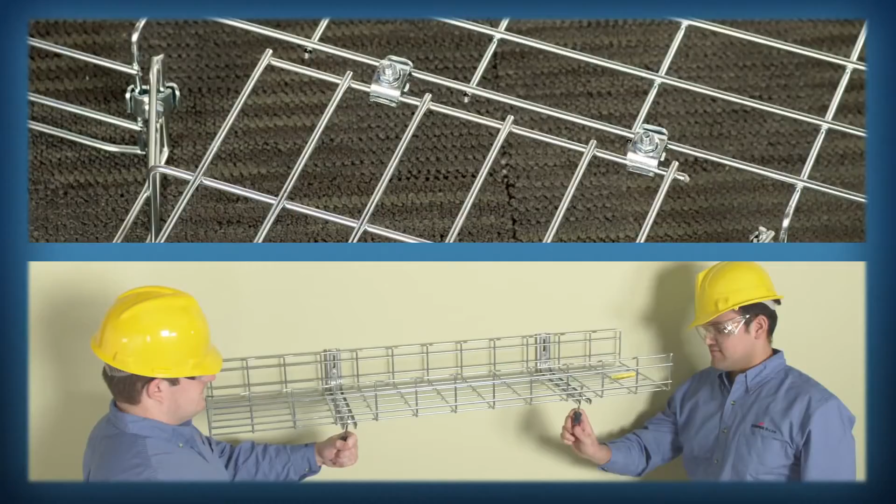Cooper B-Line's FLEXTRAY cable management system adds value on the job site by delivering flexibility and labor savings. Our systems combine strength, lightweight construction, depth, and unmatched adaptability to support cables, tubes, and flexible gas tubes in a fast and economical way. Let's take a brief look at the key features and benefits of Cooper B-Line's FLEXTRAY, then get into demonstrating how FLEXTRAY can be cut, spliced, and bent on the job site.

FLEXTRAY offers the T-Weld safety edge, protecting both the cable and the installer while installing cables. FLEXTRAY utilizes the largest gauge steel in the industry to give you stronger trays. FLEXTRAY offers one of the largest range of sizes available, and FLEXTRAY is also UL classified as an equipment grounding conductor, saving you time and money during the installation process.

Materials for installation. Having the correct tools and safety equipment is the first step in FLEXTRAY cutting, bending, and installation. Before you get started, be sure you have the FLEXTRAY catalog for installation instruction reference, safety hard hat, glasses, and gloves, clean shear or bolt cutters, markers to pre-mark your wire cuts, and all the FLEXTRAY and splice hardware.

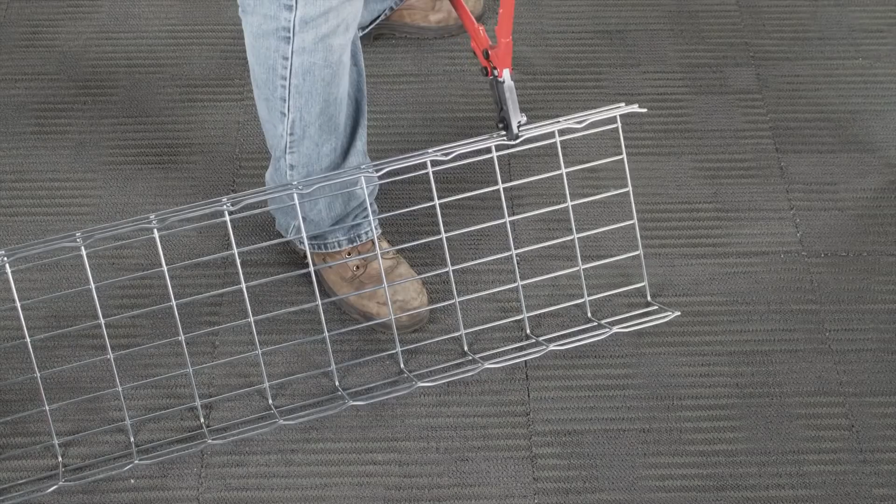Cutting techniques. Utilizing the proper cutting technique is crucial to FLEXTRAY installation. While standard bolt cutters are sufficient for FLEXTRAY wire cutting, Cooper B-Line recommends the use of the patented clean shear cutters, designed specifically to safely cut and bend FLEXTRAY into any configuration. The first step is to get familiar with your cutting tool by practicing cuts on a scrap piece of tray.

It's a good idea to mark the wire and sections you're going to cut before you get started. Once you've marked the tray, position the bolt cutter blades near the cross wire and perpendicular to the wire to be cut. Ensuring a proper cut will make the assembly faster, easier, and safer, and minimize the amount of end cut grinding required.

After you've finished cutting all side wires, turn the tray open side down and cut the wires from the bottom of the tray. Finish cutting by moving to the other side of the tray and cut the remaining wires. Before starting FLEXTRAY assembly procedures, please review the materials segment of this program for safety equipment details.

Tray splicing. End-to-end splicing of tray is quick and simple with the traditional splice hardware of Cooper B-Line's washer splice kits, where the washer is pre-staked to the bolt to hold it stationary during installation. To begin splicing, place the washer over the end wires of each section of tray with the bolt going between. Repeat until all splices are in position. Fasten the washer and bolt with the nut and finger tighten.

Then tighten with a wrench. Remember to always place the nuts on the outside of the tray to protect cable while pulling. For permanent tray splicing, use Cooper B-Line's Flexmate splice system and specially designed Flexmate crimping tool. To splice, place the Flexmate splice clip over the two tray sections' end wires and crimp the splice clip permanently into position.

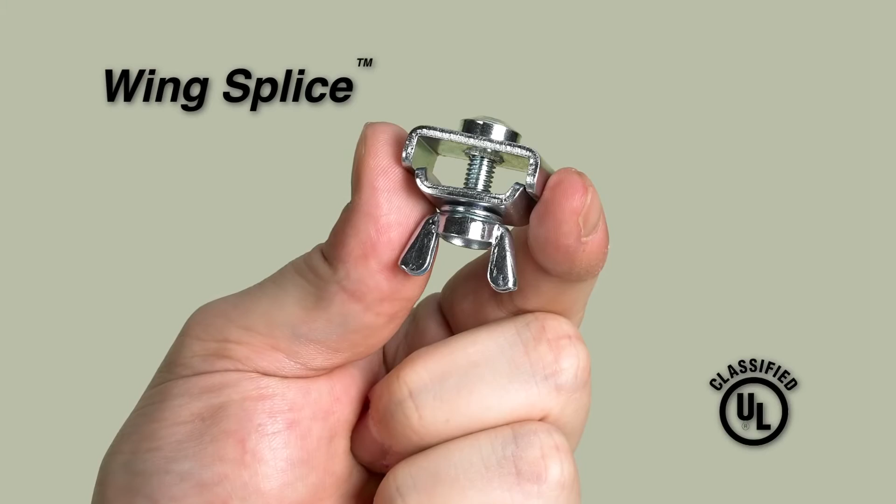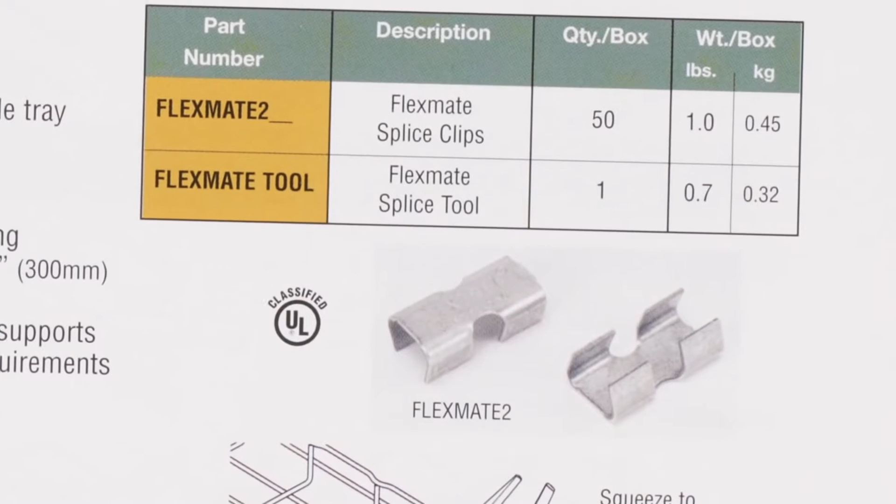Flexmate is one of the fastest and most aesthetically pleasing tray splicing methods available in the industry for sturdy, light-duty tray splicing. To further reduce tray section splicing, bending, and installation time, use Cooper B-Line's wing splice kits, designed for toolless installation. Simply install the two-piece wing splice washer and bolt assembly, and hand tighten the wing nut. If you want your ground path to flow through your splices, choose UL classified splices and use the quantity of splices specified in the product catalog.

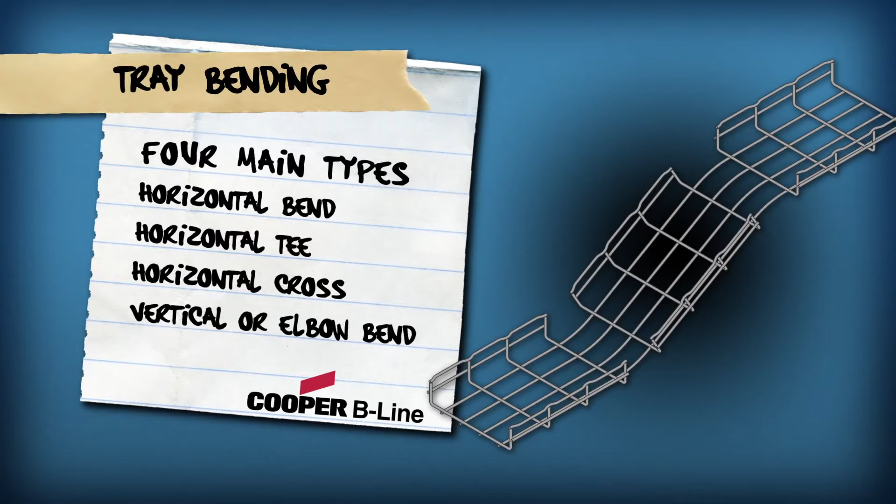Before starting FLEXTRAY assembly procedures, please review the materials segment of this program for safety equipment details. Tray bending. The ability to customize and bend Cooper B-Line FLEXTRAY on-site gives the installer unsurpassed job site flexibility and labor savings. While there are many ways to bend and splice FLEXTRAY configurations, there are 4 main types: the horizontal bend, the horizontal T, the horizontal cross, and the vertical or elbow bend. Let's take a quick look at how to quickly cut, bend, and splice each configuration.

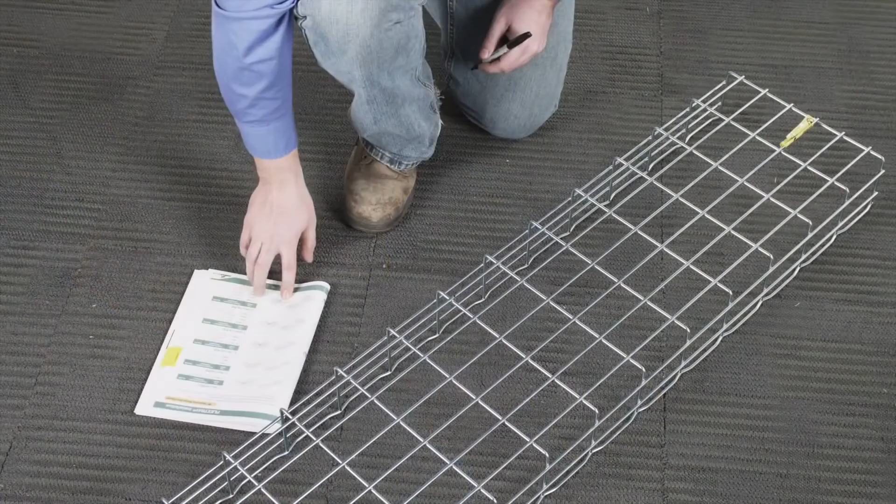The first step to create any horizontal or vertical bend is to refer to your Cooper B-Line FLEXTRAY catalog to see what wire segments need to be cut and removed from each tray in order to bend the tray to the desired configuration. The next step is to mark where the cuts will be made. Then, make the cuts. For the horizontal bend, you need to remove 2 sections of the tray's bottom wire, leaving the tray's side wire in place. Once the tray's bottom wire has been removed, bend the tray into the 90-degree position.

For assistance in making an exact 90-degree bend, the clean shear bend tool may be used. Place the tray on top of the tool so that the side of the tray is in between the rods and the center of the cutout portion lines up with the center of the tool. Hold the tool in place as you bend the tray. The clean shear bend allows one installer to make the bend easily and to an exact 90 degrees.

Then secure the bend and horizontal configuration using Cooper B-Line's washer splice kit, Flexmate permanent splice clip, or wing splice kit hardware. As you can see, the process is simple and easy to accomplish.

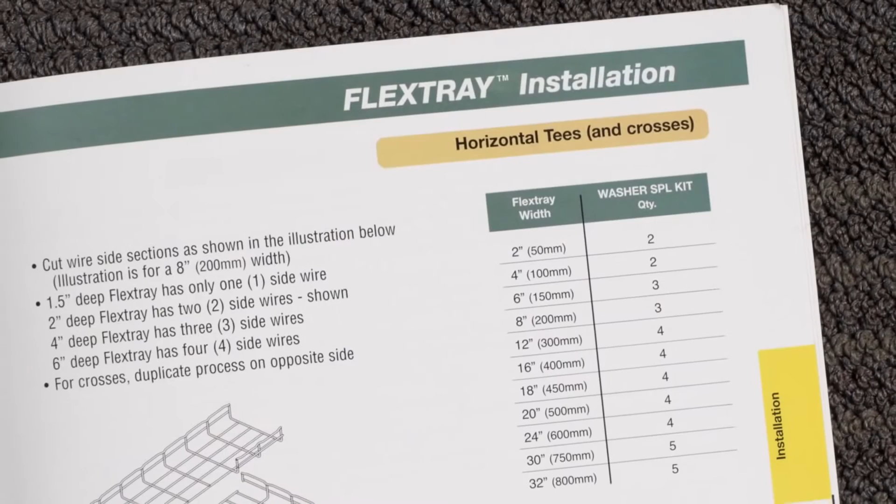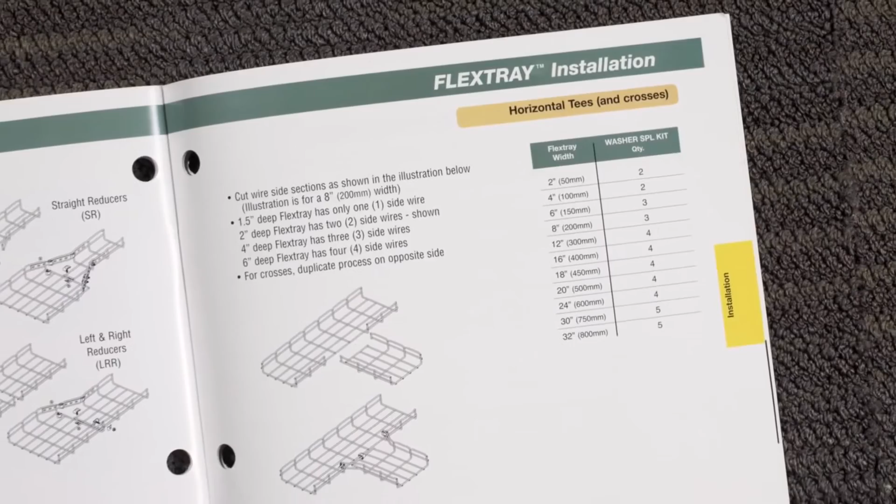Making a horizontal T from 2 sections of FLEXTRAY is just as simple. Again, check the FLEXTRAY catalog to see and properly mark the necessary wire cuts to the sides and end of the tray sections. Make the cuts to each section. Then, using a long screwdriver or other pry bar type tool, bend the sides of the intersecting tray outward to approximately a 30-degree angle.

Correctly position the 2 sections of tray together on the floor. And first, splice and tighten the adjacent bottom sections of the adjoining trays with the appropriate splice kit hardware. Then splice and tighten the horizontal T-side sections together.

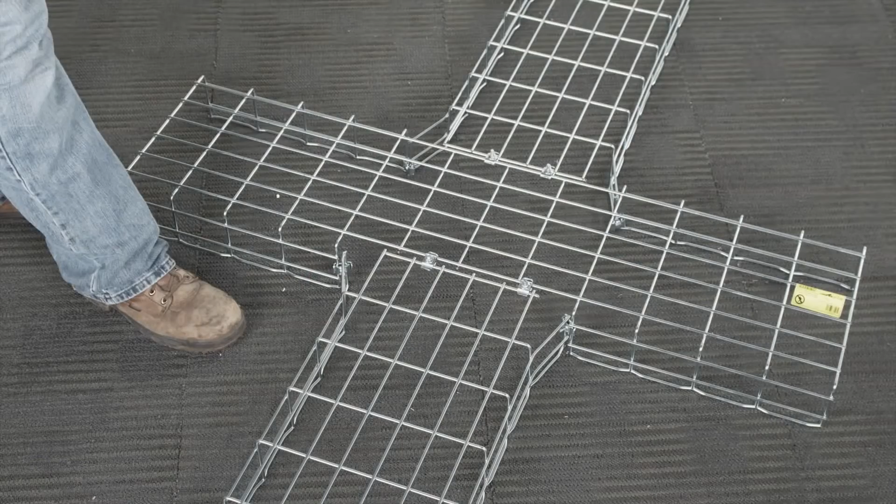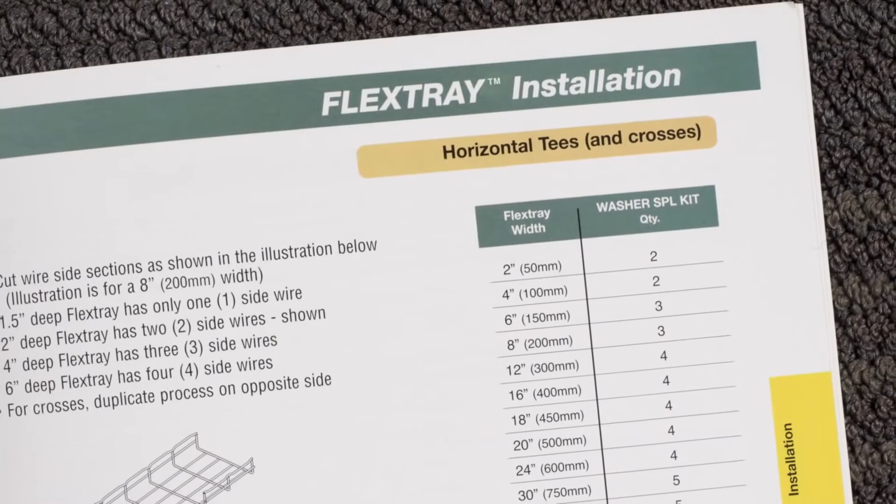Fabricating a horizontal cross FLEXTRAY configuration is very similar to the horizontal T. The only difference is removing wire sections from both sides of the designated center section of the horizontal cross. Start by referring to the FLEXTRAY catalog to mark and make the necessary wire cuts to each side of the center FLEXTRAY section. Then, remove the wire sections from the ends of the 2 intersecting trays.

Again, using a long screwdriver or other prying tool, bend the end of the tray side sections out to a 30-degree angle. Then, install and tighten the splice kit hardware to secure the tray bottom. Then secure the sides of each tray to create the horizontal cross.

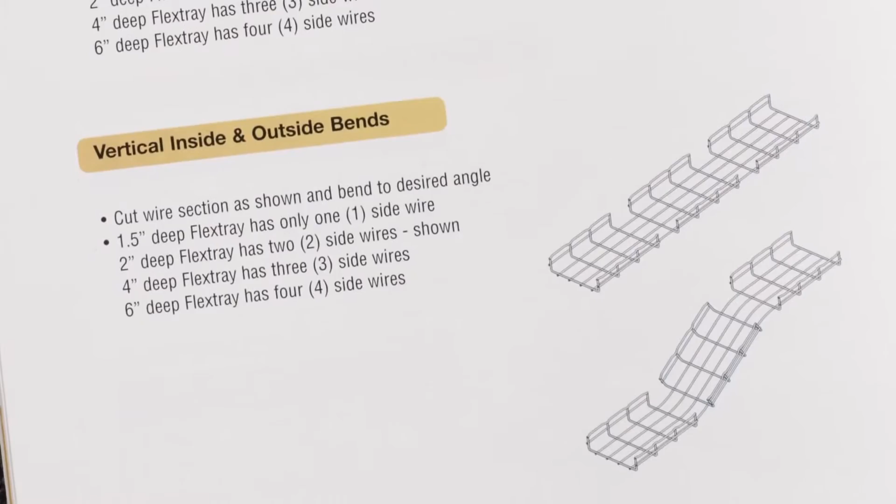Creating a vertical bend out of a section of FLEXTRAY is quite simple. Again, refer to the FLEXTRAY catalog to identify, mark, and cut away the correct tray side wire sections. Place the tray on the floor and secure one end of the tray with your hand or foot. Then, bend up on one end section to create the first appropriately angled leg of the vertical drop. Turn the tray over and bend the other end section to create the second leg of the vertical drop.

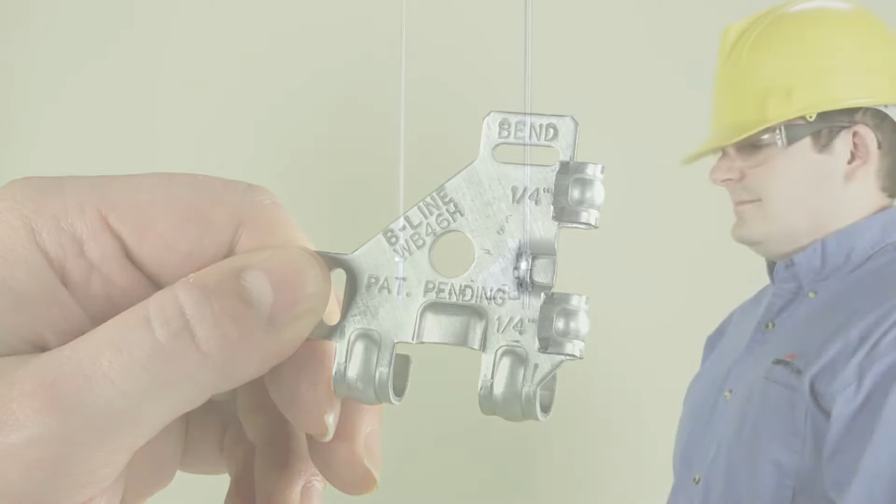Before starting FLEXTRAY assembly procedures, please review the materials segment of this program for safety equipment details. Ceiling support methods. Cooper B-Line's FLEXTRAY can be installed and supported from the ceiling with threaded rod in several convenient and labor-saving ways. The patent-pending flip clip requires no tools and can be locked in for permanent installations onto both 1/4 and 3/8 inch rod sizes. With the flip clip, you only need one hex nut to hang and level FLEXTRAY, no washers needed. This means less material and time needed to hang and secure your tray.

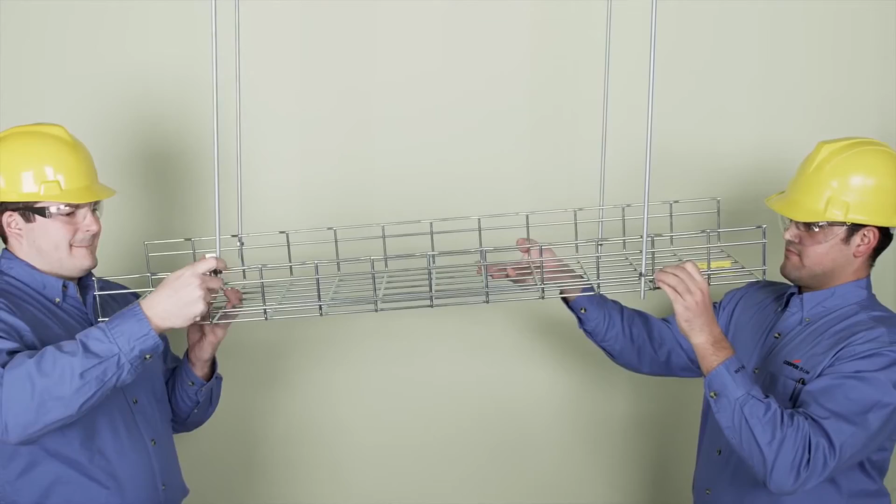First, position a nut on each threaded rod at the desired height. Lift the FLEXTRAY section into position, then attach the flip clip on the threaded rod and pre-positioned nut. Next, snap and hold one side of the FLEXTRAY onto the flip clip, then the other side. Bend the flip clip tabs to lock the flip clip onto the rod and then lock the tray section into position.

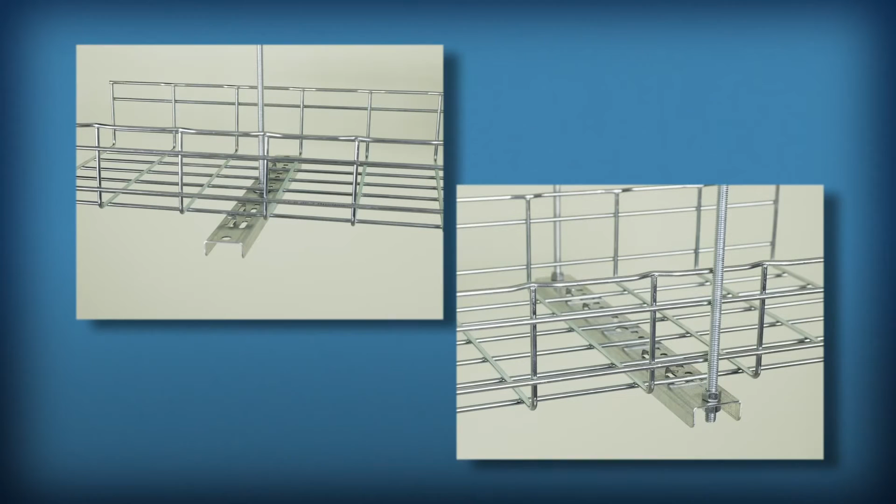For added labor savings and for fewer parts on the job site, consider Cooper B-Line's buzz nut when your next job calls for threaded rod to support your cable run. For additional versatility in installation and ceiling support, FLEXTRAY can be installed in center hung or traditional trapeze configurations with the Cooper B-Line center trapeze hanger. For lighter duty cable loads where the cable is laid rather than pulled through the run, the hanger can be used in the center support role.

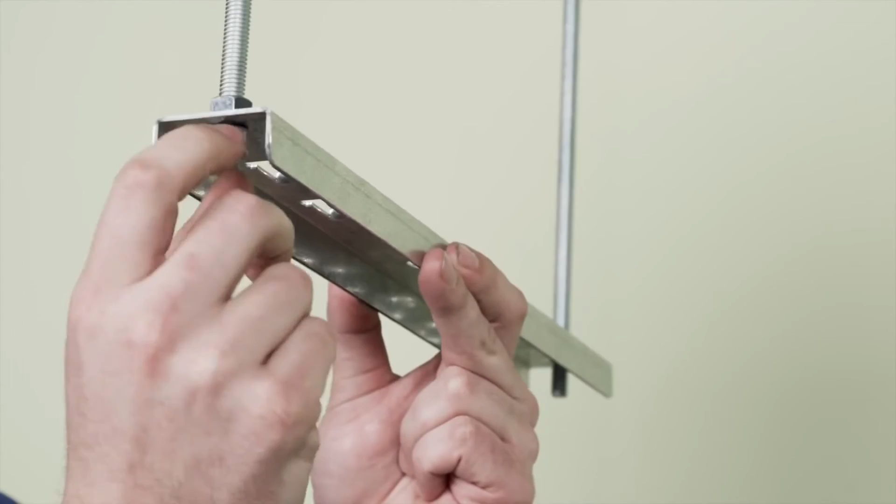Simply lift the FLEXTRAY section up to the threaded rod, lift the center trapeze hanger into position, and secure it with a nut. For added tray stability, bend down the hanger tabs over the wire on the bottom of the FLEXTRAY section. For heavier duty trapeze FLEXTRAY installation, simply mount the center trapeze hanger to the threaded rods positioned outside the tray width. Place the FLEXTRAY section over the trapeze hangers and lock down the tray by bending the tabs onto the tray wire.

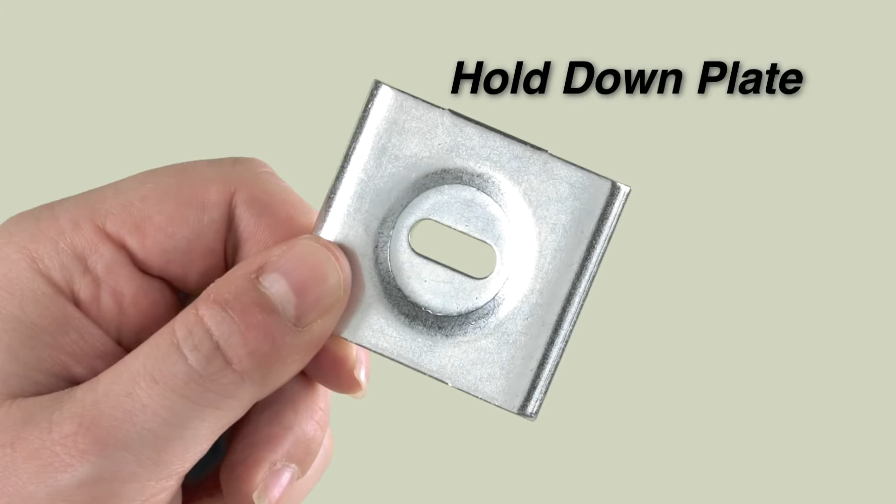For smaller width tray, Cooper B-Line's hold-down plate is an ideal support solution. Simply slide a hold-down plate up onto the threaded rod, lift the tray section into place, and position a second hold-down plate on the threaded rod. Secure and tighten the hold-down plate with a nut.

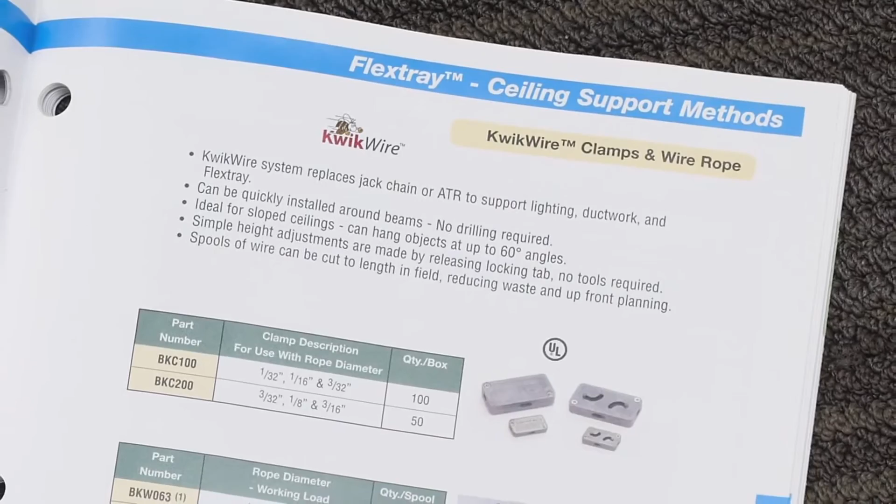For light-duty applications, or as an alternative to threaded rod support, Cooper B-Line's KwikWire ceiling support is a good choice. Simply loop the wire through the FLEXTRAY side and pull through the KwikWire clamp until the tray is level. The KwikWire can be attached to any side wire on the side of the FLEXTRAY, but the lower you attach it to the side, the greater the support stability.

Before starting FLEXTRAY assembly procedures, please review the materials segment of this program for safety equipment details. Wall supports. Cooper B-Line's FLEXTRAY is designed for utmost installation flexibility. For wall-mounted FLEXTRAY installations, Cooper B-Line offers a complete selection of both horizontal and vertical mounting hardware. For lighter load duty, use Cooper B-Line's L bracket.

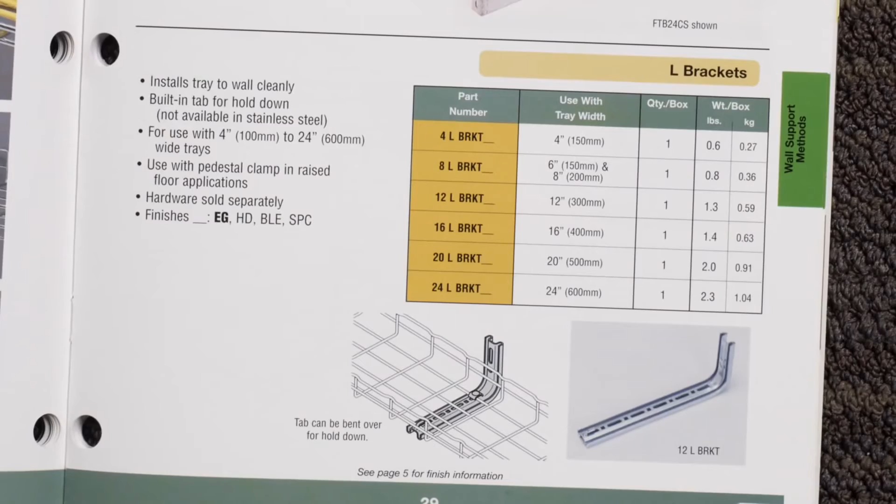Again, mount the bracket to the wall stud, but position the FLEXTRAY section onto the bracket at an angle and slide under the bracket tab and into the horizontal position. Then, bend the metal tab down over the FLEXTRAY wire to secure into position.

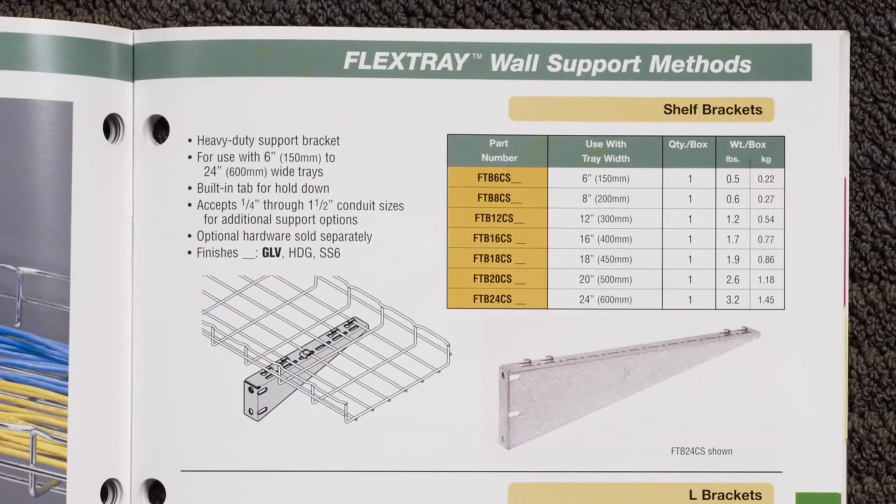For heavier loads, we recommend using Cooper B-Line's shelf brackets. These brackets offer more bend-down tabs for secure mounting. Once the shelf brackets have been attached to the wall stud, place the tray section flat on the bracket and slide the tray forward to position under the bracket tabs. Then simply bend down 2 or more tabs on each bracket over the tray wire to secure.

For light-duty vertical wall installation of FLEXTRAY 12 inches or less in width, Cooper B-Line's wall supports are recommended. Once the wall supports are mounted to the wall studs, place the FLEXTRAY section onto the supports and bend the metal tabs on the supports over the wire segment to secure.

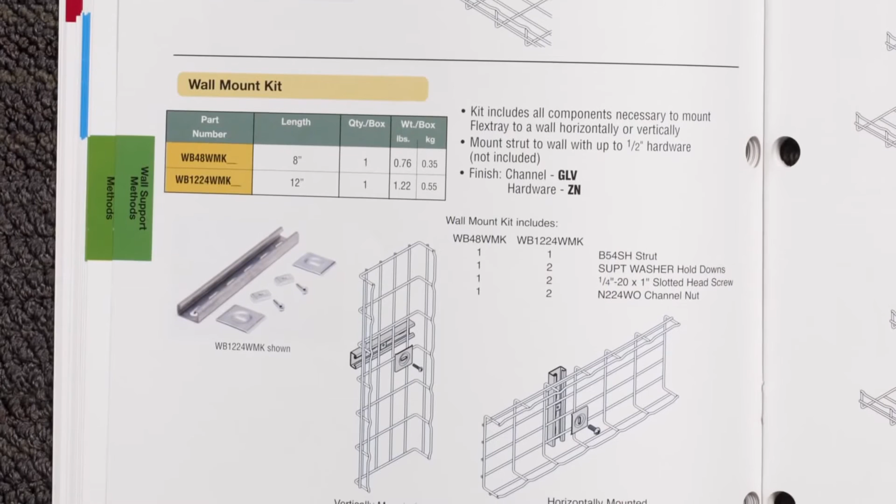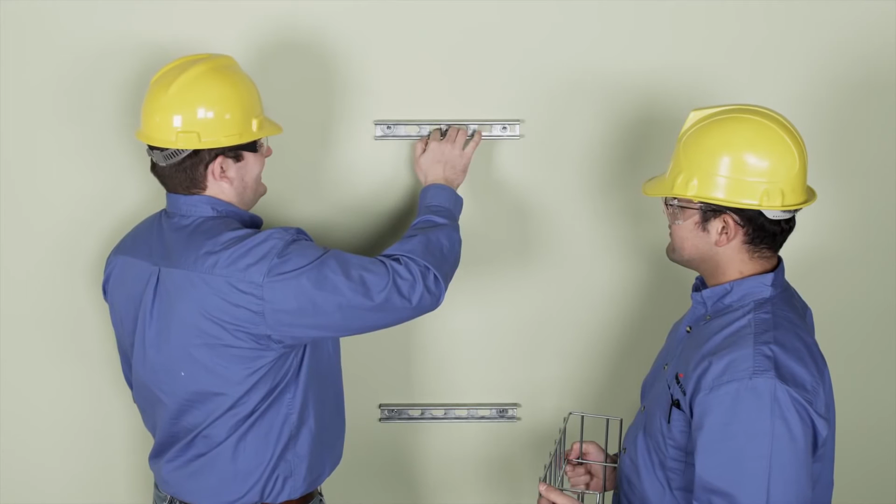For low-profile FLEXTRAY vertical or horizontal on-the-wall mounting, Cooper B-Line's strut wall mount kits are your best choice. Mount the strut to the wall studs, then attach and tightly secure the hold-down washers over the FLEXTRAY wire and into the strut framing.

Before starting FLEXTRAY assembly procedures, please review the Materials segment of this program for safety equipment details. FLEXTRAY accessories. As you'd expect, Cooper B-Line also offers a variety of application-specific accessories for FLEXTRAY cable management. In situations requiring cable run protection from debris or dust, install Cooper B-Line's FLEXTRAY covers.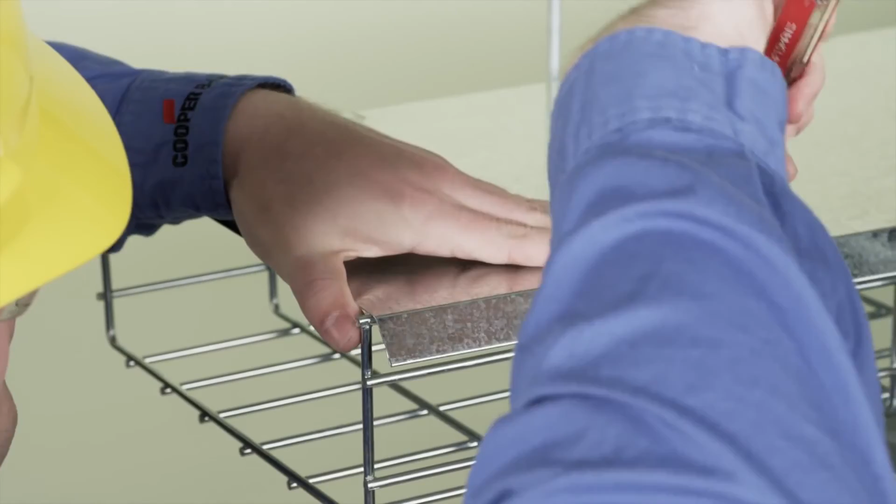Installation is simple. Once the cable has been pulled, place the cover over the top of the FLEXTRAY section and bend the metal cover tabs down to secure. Once locked down, the FLEXTRAY cables are not only protected from dust or debris, the cover also adds additional security to the cable runs.

If your cable installation requires separation within a single tray for applications such as communications cable and electrical cable, use FLEXTRAY dividers to organize and give you more installation flexibility. Each FLEXTRAY divider has rounded edges for cable jacket safety and can be mitered in the field to accommodate tray bends and turns. Each divider also features multiple attachment points for maximum installation flexibility. Simply position the divider within the FLEXTRAY section and secure with standard square washer hardware.

In situations requiring more consistent internal support surfaces or added personnel protection in low-level installations, FLEXTRAY inserts are available. The inserts also provide a more aesthetic FLEXTRAY installation where needed. Again, installation is simple with standard hardware and square washer kits.

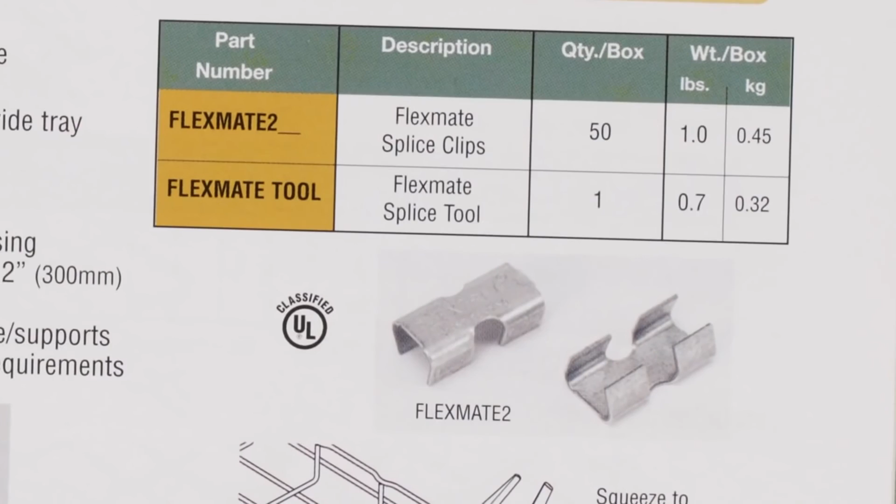As mentioned earlier, tray can be used as a ground path by using UL classified splices. Another way to achieve a UL classified installation is by running a separate ground wire alongside the tray and bolting it to each tray section. If using a separate ground wire, install Cooper B-Line ground bolts to secure the ground wire to the ends of adjoining FLEXTRAY segments.

As you've just seen and heard, Cooper B-Line's FLEXTRAY cable management gives you added value through job site flexibility and time and labor savings. Cooper B-Line FLEXTRAY and accessories combine strength, lightweight construction, depth, and unmatched adaptability to support cables, tubes, and flexible gas tubes in a fast and economical way. Try FLEXTRAY on your next project. It's an easy-to-use, simple cable management system that results in time and labor savings for the installer.